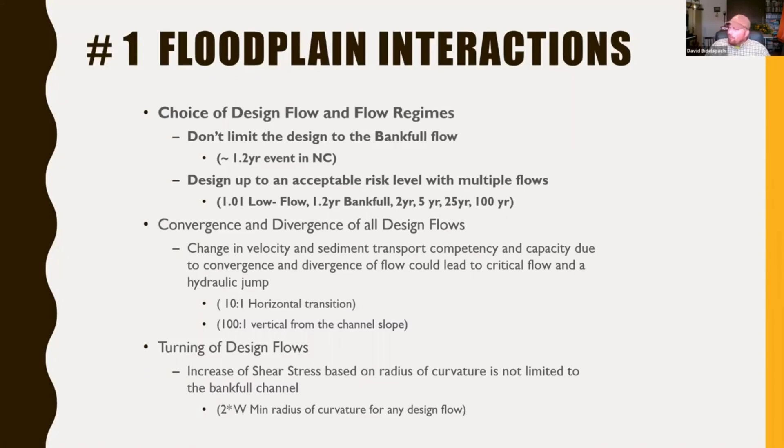Now, we still have a hard time designing for every flow that comes through, but you're going to get a better range of flows when you're designing for 4 or 5 discharges than when you're just designing for one bankful discharge.

The next thing we looked at as floodplain interactions is this convergence and divergence flows. This failed project had a lot of places where they pinched the flow in due to roadway culverts, and then they spread it out due to places where they had good easements, and then they didn't have an easement, so then they pinched it back together again. And we realized that where we had 5-to-1 transitions to 4-to-1 transitions, we had problems with sediment transport, and we had real big errors. And then also where we had things that seemed to be about 20 to 30-to-1 change in vertical slopes, we started to see transitions. So places where it got a lot steeper, a lot flatter, we started to see transitions.

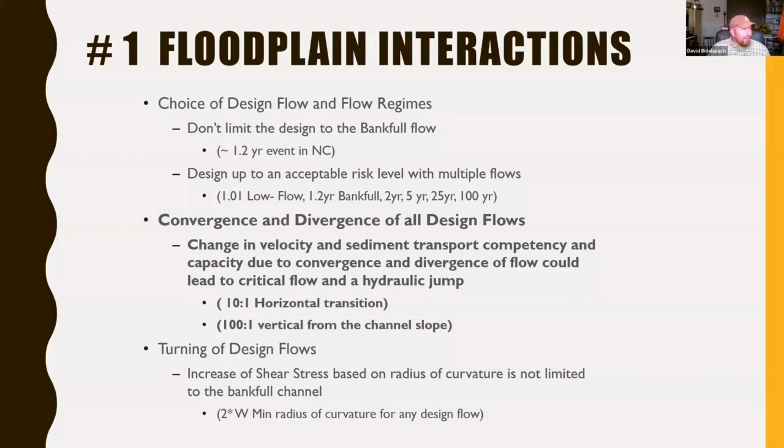So we came up with design criteria for urban channels saying that we wanted 10-to-1 transitions horizontally, just because it was about 2 times greater than what we saw failed projects at in the past. We didn't have any hydraulic modeling, we just saw failed projects, and we said, hey, we don't want to have a failed project, so let's make the transition a lot more than that 5-to-1 transition, and we did 100-to-1 on vertical slopes. And that just meant that we have gradual transitions where we have to have a transition in the floodplain. So if we go from one place where we're constrained to a place where we're not, we will make sure that we just narrow up the floodplain.

We'd rather take a little bit higher shear stress and mitigate for that shear stress than have a convergence or divergence issue if we have a higher sediment transport load. If we have clear water discharge, it may not matter. And then the final idea of floodplain interactions was turning of the design flows. And at this point, we had reference reaches for a lot of bankful channels, but we didn't have reference reaches for floodplain channels.

So a lot of times we saw people that would remember working with George Kelly years ago, and we saw a failed stream restoration project, and we thought that the bankful channel was too small, but it ended up being that the radius of curvatures were just too tight for the floodplain. They made the radius of curvature change be as tight on the bankful channel as it was on the floodplain channel.

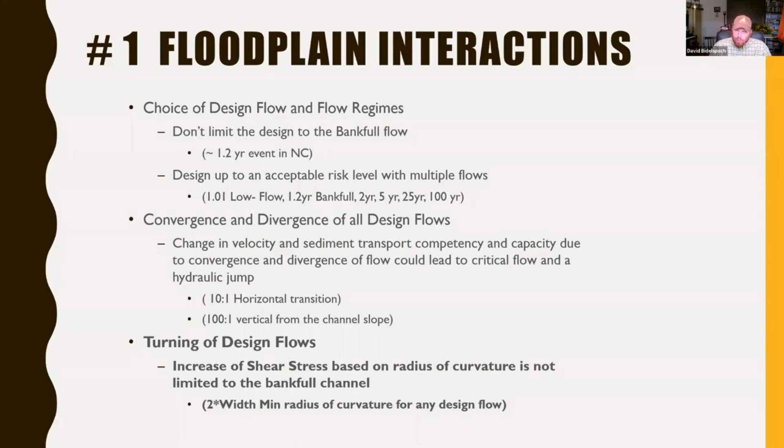So one of the things we look at is design flows. Let's say we have 5 design flows that were designed to an inner berm, a bankful, a flood terrace, a 100-year discharge, and a regional discharge. Make sure that the width of any one of those flowing discharges does not turn at a radius of curvature that's more abrupt than 2 times the width of the flowing water. And that's a reference that we got from the Army Corps of Engineers years ago, but it has seemed to work pretty well.

The next point that we looked at is energy dissipation in urban systems. We've seen a lot of urban systems where they put in just a straight line channel and they don't put in any kind of concave pools or any kind of pools, and they have longitudinal profiles that have a concavity that decreases as you go downstream. So in other words, it's like a hinge point in the valley.

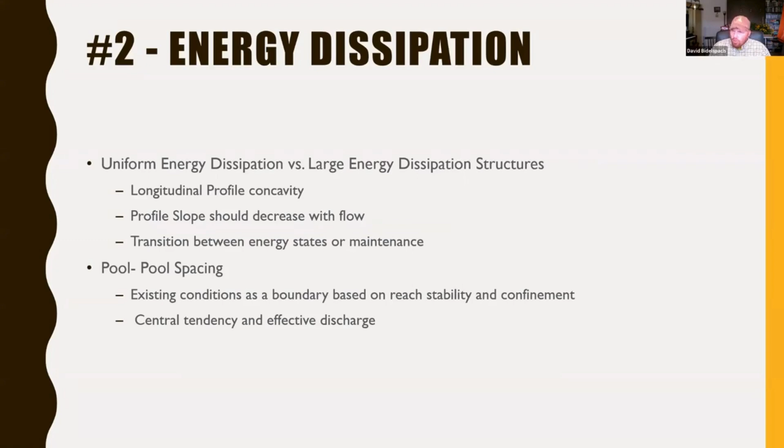So what we noticed in doing urban stream design, this is a project that Brad and I worked on years ago in Cary, North Carolina, is that when you're looking at urban stream channels, we definitely want to see that at higher flows we don't really see a break in the water surface slope, that it all becomes the same slope. We want to see that flow reversal so we can reduce our bankful slopes so that our low flow slopes are steeper than our bankful slopes. What that means is that we have less of an increase of shear stress as the water increases. So we still increase the shear stress, but it doesn't increase as much because the slope is reducing.

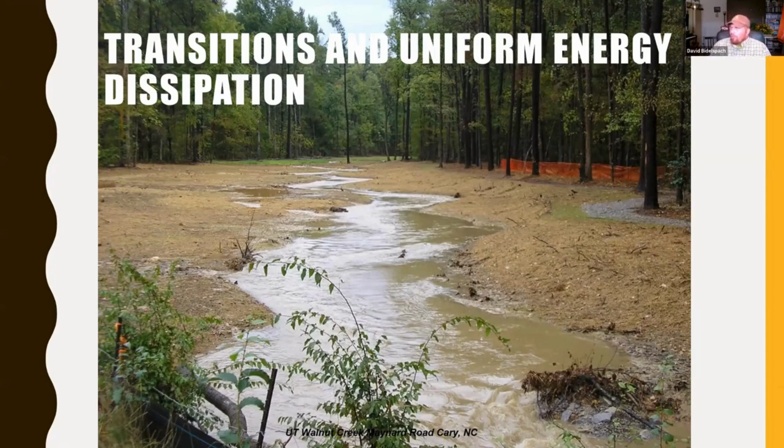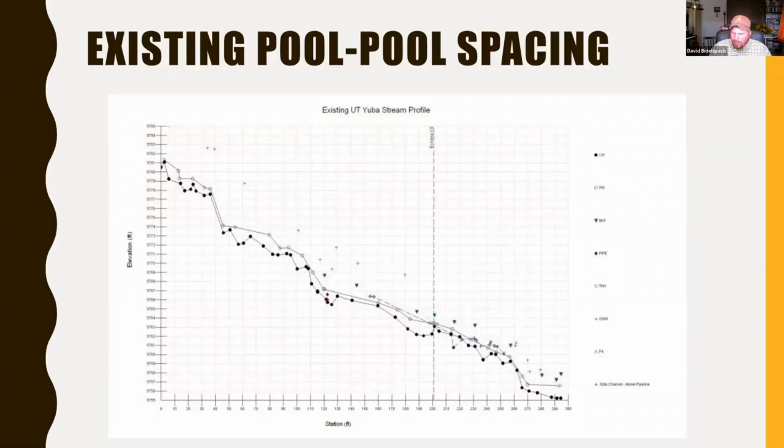We saw this in some early failed stream restoration projects from the early 2000s up in Ontario, and we noticed that they put in a straight line channel, but we came in a couple years later and the channel had scoured out, but it also created this pool-to-pool spacing feature in an urbanized system that was very predictable. So we saw that pools were formed even though the pools were not constructed. So the idea of looking at existing pool-to-pool spacing on urban channels is important because a lot of times that will tell you where we need to place pools in a disturbed reach when we're looking for restoration.

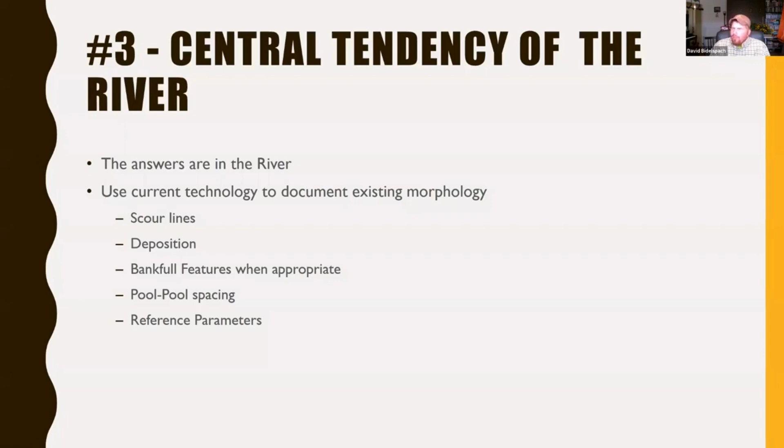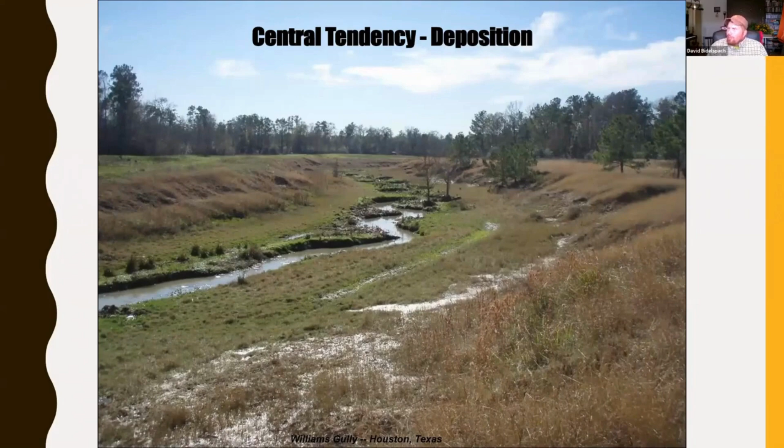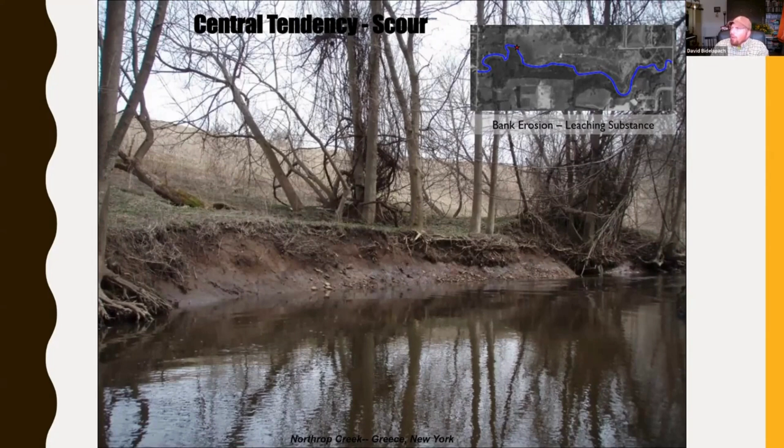We saw this on a project we did looking at scour potential up in New York years ago on a landfill as well. But looking at that scour potential helps us understand where we can place these channels away from urban constraints and say, okay, if this is our scour potential, then let's move the geomorphic floodplain away from here, and then we can still use this area as floodplain and reduce risk.

The fourth idea is, on urban channels, it's really important to look at reference shears. And what this means is looking at the materials that are going to be available to it, the vegetation that you expect to come down through the site, and looking at where we have rack lines and having a better understanding of how much force that vegetation can withstand.

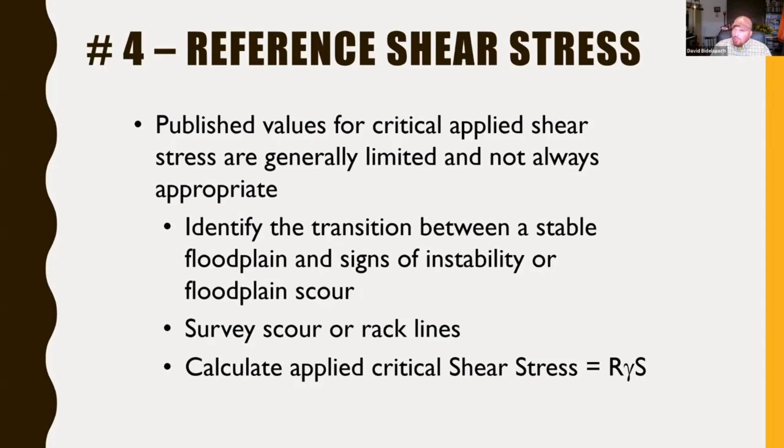So if we can remember, Brad and I did a project in Medicine Hat, Alberta years ago, and the whole idea of this project was we were trying to understand how big of a floodplain we had to create. All the documentation told us we need a really big floodplain, but our side slopes were very fragile soils and very steep in this old coulee.

And a coulee is essentially a drainage ditch that doesn't pick up a whole lot of water and is only really picking up the water that falls on the shape of the drainage ditch. So it becomes a very fragile sediment because it hasn't been formed over years and years of flowing water from upstream. It's really just what falls on the shape of the ditch.

So we wanted to look at what vegetation would withstand, and for us, if vegetation could withstand a higher force, that means we didn't have to cut as far into the hill slopes that we were concerned about long-term stability if we did so. So we went down and we looked at the vegetation that was down there. We measured the width of the floodplain as well as the depth of flowing water over the floodplain where we didn't see deformation. We used rack lines to look at that depth of flow over that floodplain.

So we walked down in the floodplain and said, okay, this is where we're seeing deformation. This is where we're not seeing deformation in the floodplain. So where we're not seeing deformation, we can use this native vegetation to withstand this shear force that's being applied. That's really important in urbanized systems as well, because we usually don't have enough floodplain. And if we don't have enough floodplain, then we have to start looking at mitigation methods for that floodplain.

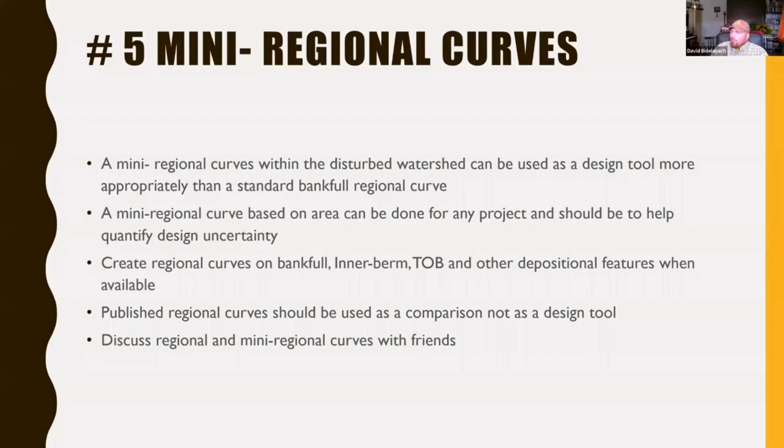So looking at a mini regional curve is looking at multiple depositional surfaces and where vegetation and scour are related to those surfaces. So we think about this related to the Harris County curve, and we looked at multiple depositional surfaces and looked at, okay, how can we design 4 different stages of a channel based on reference criteria we have, and can we correlate that back to drainage area?

So what we looked at here is not just a bankfull regional curve, but an inner berm regional curve and a top of bank regional curve related to percent imperviousness for different areas related to urbanization. And that helped us guide what we called a 3-stage channel design, and with the 100-year discharge, or the regional discharge, on top of that, that would give us a 4-stage channel design.

The mini regional curves are important. They also help us, as I talked about earlier; sometimes we think that people identify bankfull wrong, and that's why a project failed. This is a project we did with George Kelly years ago, and we went out and looked at a channel, and it was supposed to be the bankfull channel. I thought it was going to be all wrong. We went out to the mini regional curve and found out the bankfull channel was actually appropriate, but what they had problems with was, as I mentioned earlier, floodplain interactions.

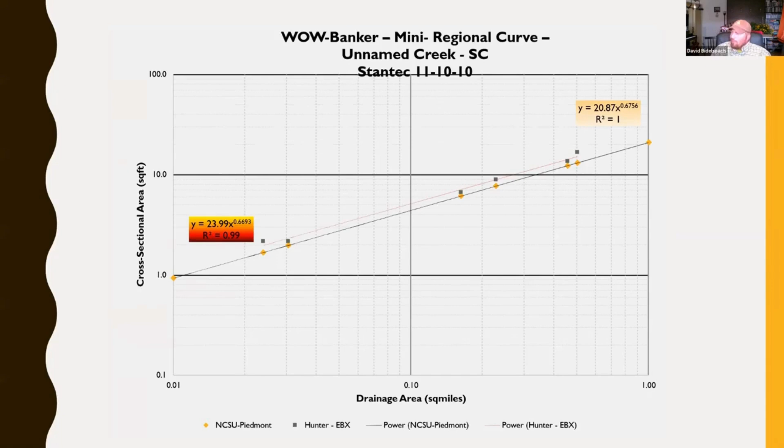And our final thoughts are urban channels and using natural channel design in urban settings. Really, it should be a process-based design, meaning that we need to lay out our goals and objectives and tie our goals and objectives to why we're using a tool. Using natural channel design is very useful, but it should not be used as a religion or a stepwise methodology in an urban setting. We have to use it as kind of a backbone or a basis for our design, but we don't want to use it as our religion and say, hey, let's do this step, this step,

this step, this step, because I can guarantee you that looking at alluvial channel design that's laid out in natural channel design processes is not appropriate for most urban channels, because you don't have a high enough supply of sediment coming onto the site, because sediment has been held back from urbanization issues and pavement in the upstream.

Identification of bankfull is always important, even in low sediment supply systems, if for nothing else to help you understand where you can expect revegetation of different ecosystems. And flood stage reduction in urban systems should always be considered as a selling point. And invest in the pretty. In other words, in urban systems, it's really important for aesthetics. Don't underplay aesthetics and say, I just need a functioning ecosystem.

One of my favorite studies to look at is a study by Peter Wilcock that he put together years ago when he was at Johns Hopkins University, and he was trying to show that natural channel design didn't really have a place in urban systems. So he went out and he just surveyed people, landowners, and said, what do you think about this stream project? And he expected people to say, well, it's a big waste of money. It's not doing very well.

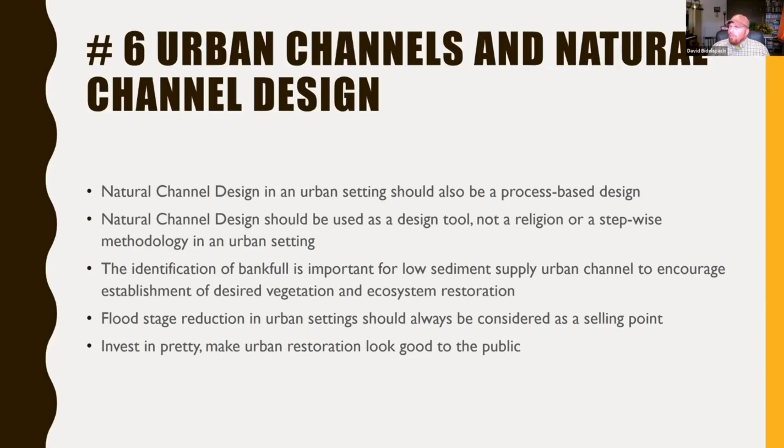So, threshold channels in urban systems are important. We generally have to hold riffles in place because we're not going to have resupply of sediments. So finding ways to make channels look nice while still not letting the riffles move is important in urban channels. And natural channel design is better than the alternatives.

So natural channel design is useful in urban systems. Bankfull is important, even though it's uncertain. And natural channel design really shouldn't be used without other design tools. If nothing else, we need to be looking at risk analysis.

We need to be looking at HEC-RAS. We need to be looking at the idea of where we can put in threshold riffles, not just the standard natural channel design methodology. Urban projects should, at a minimum, address uncertainties and risk analysis, and this generally hasn't been associated with natural channel design processes in the past.

And this presentation was in 2010. It was presented in front of Dave Rosgen at the Sediment Interagency Conference, as well as others. And unfortunately, I would say that risk analysis and uncertainty analysis is still not included in natural channel design as taught by Dave Rosgen and others. Now, he doesn't say you shouldn't do it, it's just not taught that way. I think that's something we can add to the industry, really encourage that natural channel design is done in a way that we can look at risk assessment in urban systems.

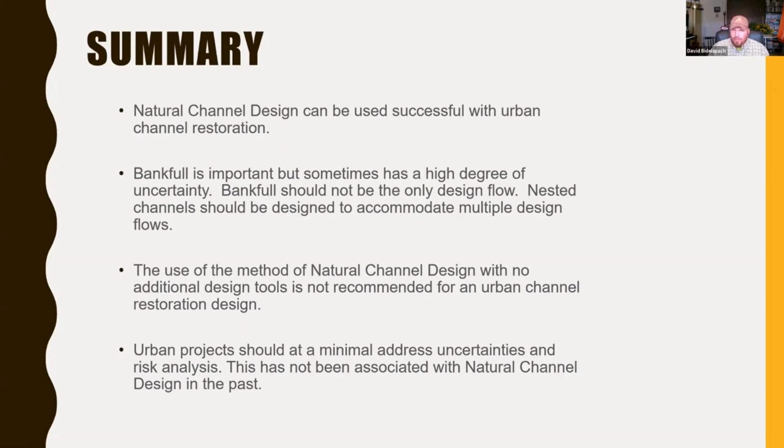So with that, that's my presentation on urban natural channel design, urban stream restoration today. Any thoughts, questions, concerns, comments?

That was a really fast overview, Dave, but it was really good. Yeah, at least it wasn't 70 slides. I cut it down to 20. Yeah.

It's neat because it's got a lot of the rules of thumb in there that you only get after doing this for years and years and years. Yeah, and those are all the rules of thumb that are in this presentation. I had updated. Some of them were slightly different in my original presentation, but they're all kind of the same ones that we're doing, that we're encouraging people to do now.

So. And watching you is kind of like Alex Trebek, you throw in the odd Canadian thing just to try and help teach the Americans, so I appreciate it. Hey, you bet, eh? Keep your stick on the ice. It's also Victoria Day. It's a holiday in Canada today. Oh, Brad, that was one. That was one funky looking Kool-Aid up there.

So Dave, a couple thoughts that I had, and I'm not the technical guy here, but I do see this a lot when we're trying to do work in urban areas, which is two things. One, your goals and objectives may be so different from your traditional goals and objectives in some of the hinterland areas. A lot of times it may be stormwater related, it may be flood reduction related, it may be recharge related. And those warrant different approaches. And I think that to me is one of the key things, is that sometimes your orientation may be very different, that's driving those goals and objectives. And then the other thing is this multiple benefit approach.

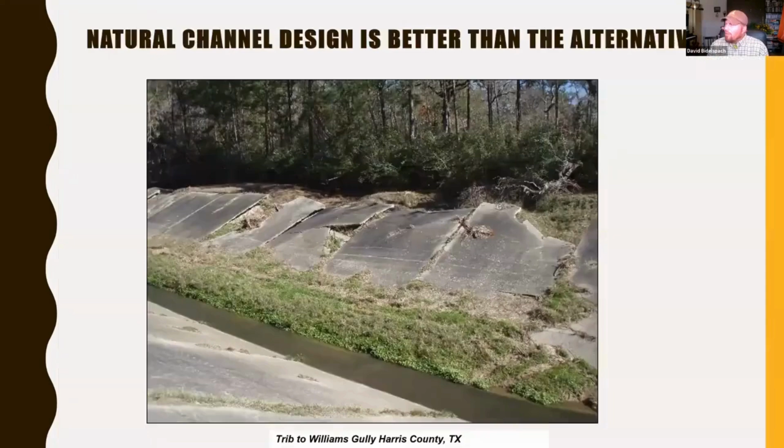And I think we could start to develop what's called an urban terrace channel. So this is a channel that shows up in these urban environments. That's a channel enlargement, but it's not particularly a bankfull channel because it doesn't allow for the same sediment exchange. It doesn't allow for the same revegetation potential as a bankfull channel would. But we still need to design that into something. I think that's where hydrology modeling would be really important in the future. And I think that's the way we'd want to start looking at it. And maybe at some point it would lead us to changing the size of these bankfull channels.

But what we've kind of seesawed back and forth on is, hey, bankfull discharge will increase with urbanization, and we've created curves based on that. We've seen a lot of failures based on people building curves off of that. Then we went back with Reed and the Watts Branch stuff and Luna's stuff and said, okay, well, maybe the bankfull channel doesn't change. And then we came back out and looked at things and said, well, no, there's actually something happening here. So maybe it's just another channel we have to look into. And that's kind of where we started moving to this idea of a 4-stage urbanized channel design.

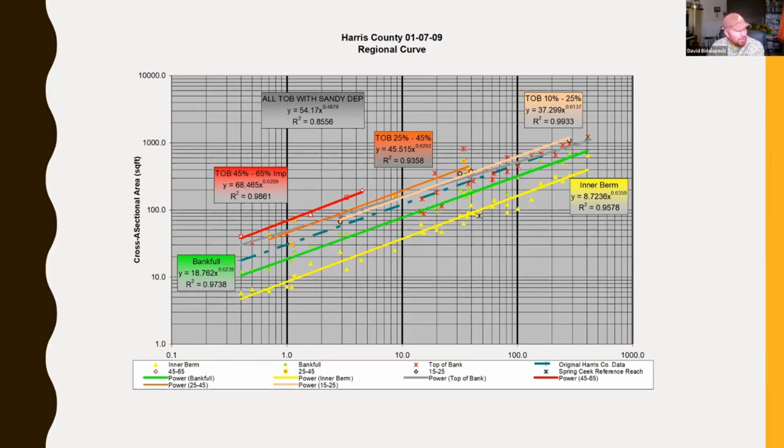Dave, on the lower channels, when you're balancing clients' demands for view sheds and stuff like that, how do you balance the shear stress and velocity on those lower channels? If your upper channel, your 25, 50, 100-year channel, is staying roughly the same, but on your lower channel the clients want various view sheds, and sometimes those view sheds cause a higher shear stress on some bends or things like that, how do you balance that?

And it helps us figure out, okay, where do we need to mitigate the risk that we have? And a lot of times when we're looking at view sheds, it's really just, hey, we don't have native vegetation that'll grow here because they want to keep open a fairway or they want to be able to see through here. So how can we mitigate that? You know, is it a matter of putting down coir blanket? Is it a matter of putting down floodplain sills?

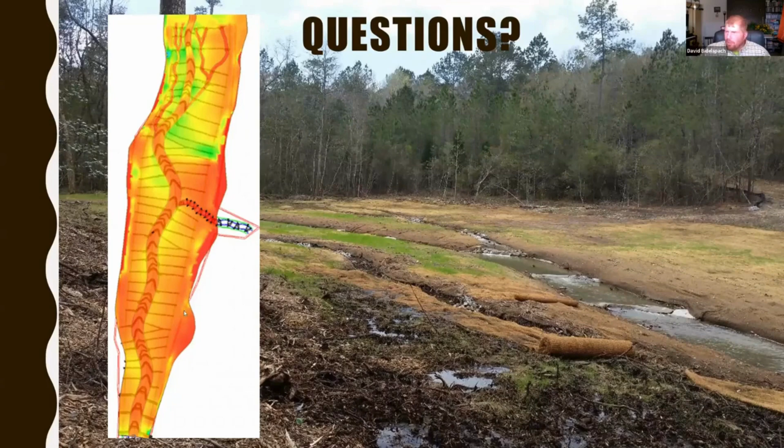And then does Crystal have anything that she had you working on this week yet, or are you done working for things with Crystal right now? I think I'm done working with her for now. Okay. So are you going to be on the SWCA calls this morning? Does that kind of fill up your morning until sometime after 11 like it does for me? Yes, it does. Yeah, that's kind of what I thought too. So how about first look over this detail in the morning and make comments, and then right after lunch, we'll try to get Josh on the line.

And then I also want to have a meeting with you and Ken, and we're going to look over a way of predicting sediment yields for Buffalo Creek watershed for Strontia Springs this afternoon. I want you to start looking at some representative reaches. I'm going to have Luis look at it as well, and then you and Ken. And my hope is that we can use LiDAR and aerial photography to predict sediment loading rates over the last 15 years since a fire on Buffalo Creek watershed on Strontia Springs. So that's what we'll do, and I'll have Ken on the line. And I'm guessing that phone call will probably be right after lunch, around 12:30 or something.

But essentially, what we're going to do is, I didn't want to go out and survey a whole bunch of tributaries when we have really good LiDAR data, and I think I can predict sediment loading from this LiDAR data. And I'm going to want to document it pretty well, because if we do it this way, it will be fairly unique in the sense that I've never seen it done the way that we are, and it's something I'd like to share with people in the future.